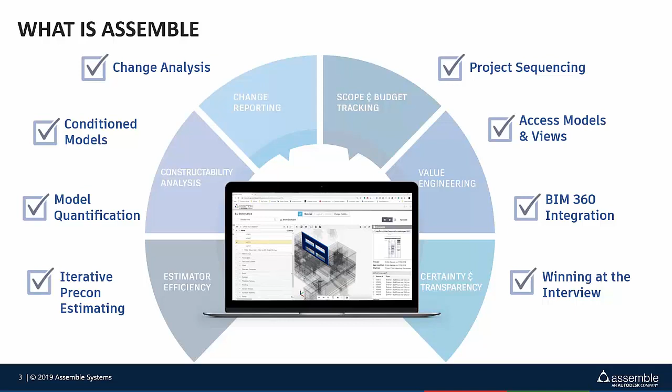Tomas, why don't you tell us a bit more about AIA? AIA is a construction company that has been in the market for 70 years. We have an average income of $100 million in construction. We are expecting to earn around $60 million this year. We have around 600 direct employees and above 2,000 indirect. We are delivering to our customers around 100,000 square meters every year, and we have delivered more than 700 projects in different market segments.

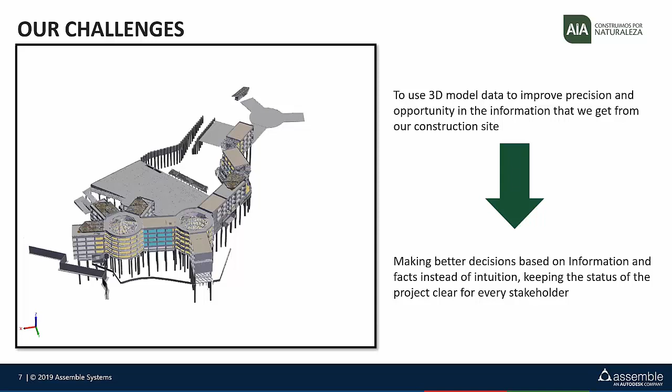So what is our challenge here? Our challenge is taking all the information that we put inside a 3D model and using it to leverage the way we make decisions. We are going to go through a process where we use the model to put critical information there so we can take it to our project team, our managers and senior managers, to make better decisions and make them on time, keeping the status of the project clear and letting every stakeholder know how the project is developing so far.

How Assemble is going to help us is by allowing us to use the model as a container for critical information like the budget and the schedule. Assemble lets non-Revit users manipulate and feed information into the model. This was one of the critical challenges: giving this information and letting everyone around the project interact with the model without the chance to damage the information or the model.

With the Excel add-in that you guys have developed, Assemble and Excel let us add some intelligence to the model and make decisions by itself, so we don't have to be very manual. We can add logic to these models and let the program do the hard work, giving us clear time and space to make decisions and look for critical problems.

Which are the key features that Assemble gives us? One main feature is we are web-based, or iPad with an application, so I don't have to have a very expensive, high-end machine to access models from any computer. I only need a good internet connection with good speed, and that's all I need as hardware. No software to manage, no trouble with licenses or installing anything on Windows or Mac OS. It's just a web page.

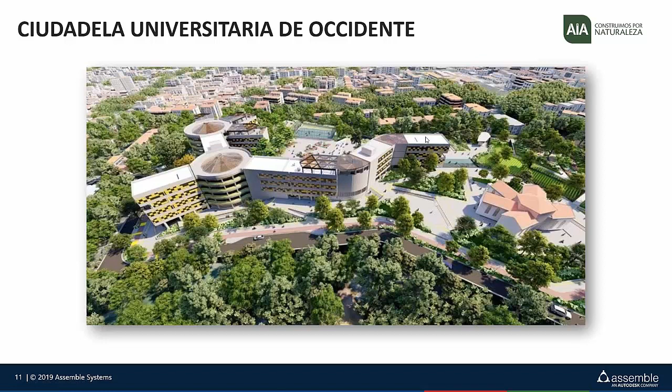So let's go through the case study. We'll use one project under development right now, which I hope will show you this process of controlling schedule and cost using this platform. Our case study is Ciudadela Universitaria de Occidente, a public university here in Medellin. It's about 13 different buildings, 5 stories high, with site development around 25,000 square meters of building construction, 30,000 square meters of landscaping, building new capacity for up to 8,000 new students in the city.

The special thing about this project is it's all about social transformation around a place that has been affected by violence here in the city. The site of the project used to be a jail for women, and it is a public project.

One of the main key features of this project is that it is the first public project here in Colombia that has some BIM requirements for the general contractor for the bidding process. That's actually one of the main reasons AIA won the bidding, because we had the BIM experience to make the project come true.

It's a project that is financed by the Empresa de Desarrollo Urbano, a public company here in Medellin that is in charge of the landscaping and urban development of the city.

So which were the project expectations? The project expectations were around being able to track the status of the construction process at any point in time.

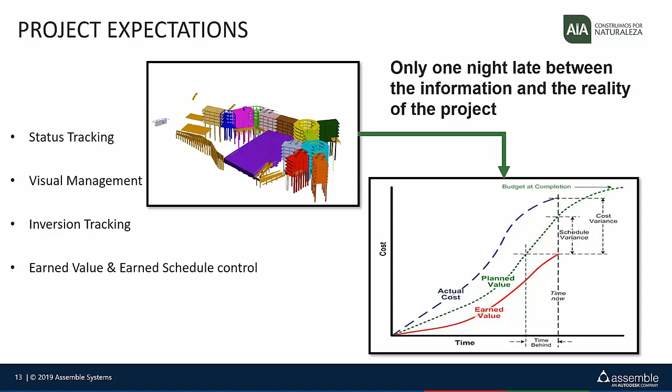So the magic about this is we never feed this information manually from the platform. We use the Excel add-in for it to get fed.

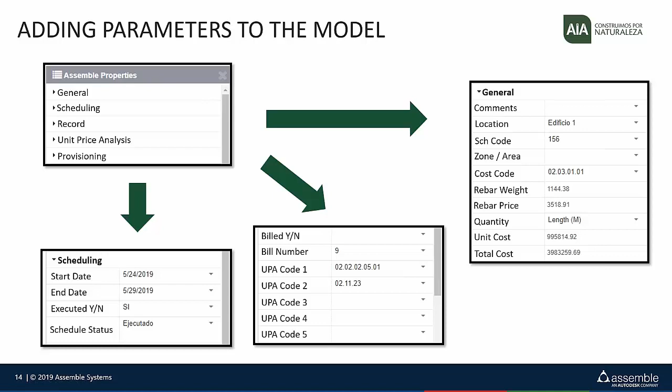So once we have these empty containers ready in the model, we have the heavy manual process here, which is checking every element in my model and matching this element with its own item in the schedule and with its own item in the budget. I have to take this information from my budget and this information from my schedule and feed it into the Assemble model. So this may be the hardest and longest process of all the workflow here.

One key thing to add in what you're talking about here is it's important to note that we're not working with a file, we're working with objects. That means you have the flexibility to have different budget information than schedule information, and that can be as granular as you need it to be.

In some cases you're selecting a big chunk of the building, a number of objects that have a particular location code or value or a schedule value, and that's different than the set of objects that might pertain to the specific budget information or cost information you're feeding in. I think it's a fantastic workflow in articulating or showing the setup you have here, and certainly interested to see how you're pre-populating or automatically populating some of this.

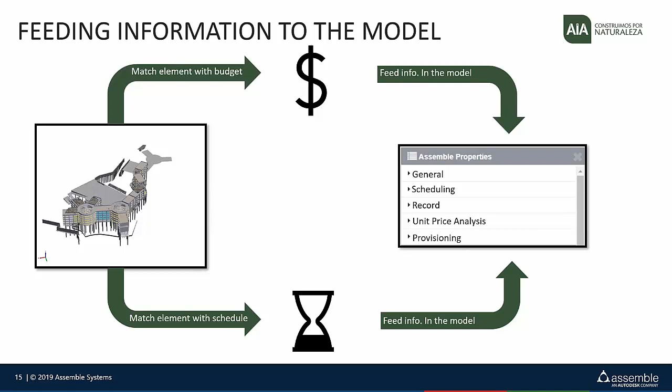So the magic about this is once you have all this information populated in the Assemble model, I can use the Excel add-in to download all this information to an Excel template, and here is where I add some intelligence to the model.

It's just about writing down some conditionals that look around this set of questions. Our Excel is going to ask if a task is done, yes or no, as I was showing around here. It will be a yes/no parameter, and then it will look for the current date you are running the analysis, and check the start and finishing dates for every element, and answer if the element should be done by that date or should not be done by that date.

So at any combination of these four paths, you will have a task that is on time, ahead of time, delayed, or pending.

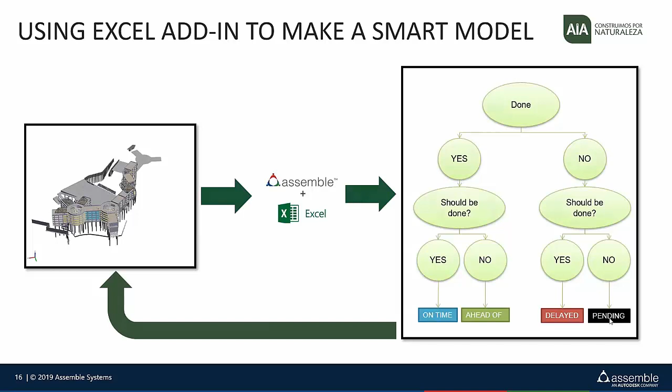And once we put this information from Excel back on Assemble, this is what it's going to look like. You'll have some activities on time, some activities ahead of time, some activities delayed, and we have some more color codings over here.

Maybe you can notice a little yellow here. This is because, going forward from these four possible states, we are filtering the look-ahead work for one week and for a couple of weeks ahead of the time we are running the analysis.

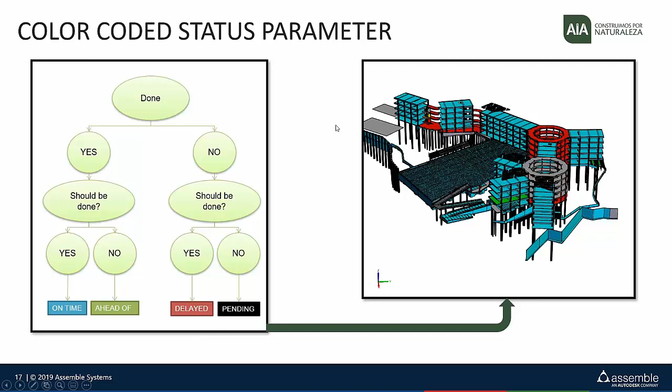So the model is helping us communicate to every stakeholder and team member what's the status of the project, but not only the status, also where they should focus for the coming weeks. So they should know to put resources here so they can finish these activities by the end of this week.

So how this works in the actual project: I have job site progress, and a site engineer who uses a tablet to feed the actual progress of the site into Assemble.

Assemble will do its magic, running in the cloud, and synchronize. Another person, not the site engineer, processes this information, sends it to Excel, updates the Assemble project, gets numbers for earned value control, and sends the tracking and reports to the management areas.

One key thing about this process is these two people don't have to be in touch—they don't even know each other. It's all about collaboration around this linear process.

Another key feature is we are doing this process on a daily basis, and it doesn't take more than an hour for one person and not more than five minutes for the other. So there's not a lot of effort around this process—it's almost automatic.

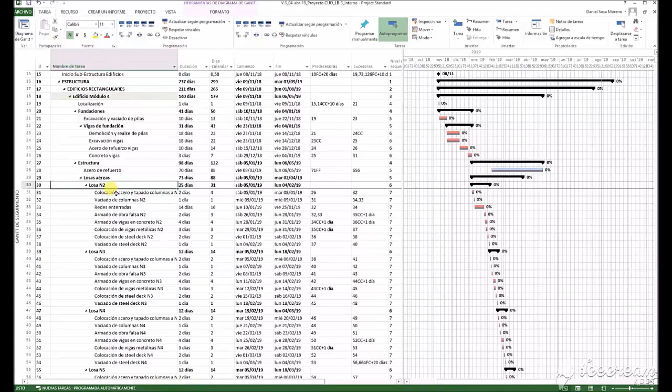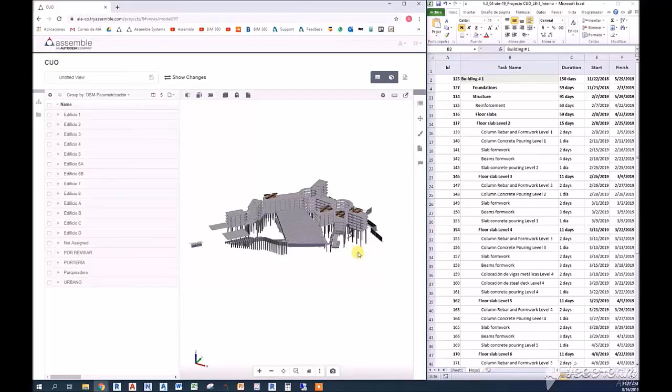And what we're going to do next is get into Assemble and do something Assemble recommends a lot: breaking down the whole model into little, more manageable packages. So here we take the structure, isolate only this little building, and create a work package for it.

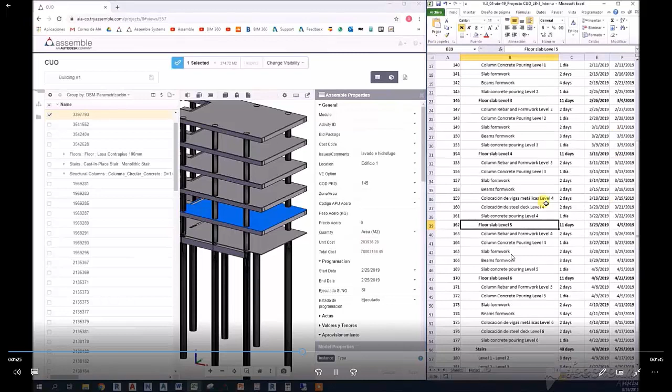Now I'm going to start feeding the dates from my schedule into every element in the model. Right now you're seeing me feed it element by element, but there are several ways to make this much faster—Assemble inventory helps a lot with filters so I can feed this information faster, and I can also use the Excel add-in to speed up the process.

And here we're doing a very similar process, but using our budget list. So you can see I have some coding on the left, a description, a unit of measurement, and a unit price.

So what I'm going to do is check which elements of the model match this description in the budget, and feed these elements with the item code and unit price, which you can see over the Assemble parameters—the columns match with the code column and the pricing column.

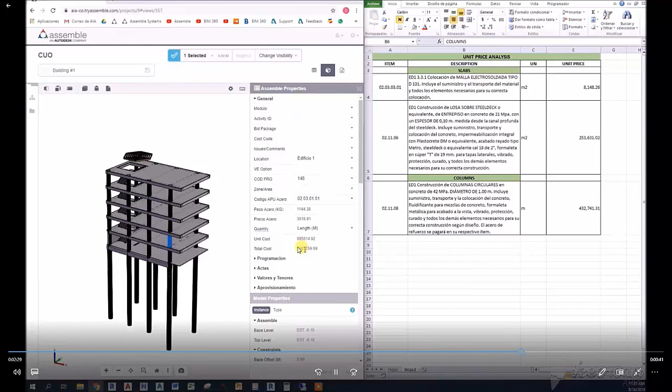So once we have this information, we're ready to make the model look like this. What we actually do is use the color-by-property tool in Assemble, giving matching colors for every possible status.

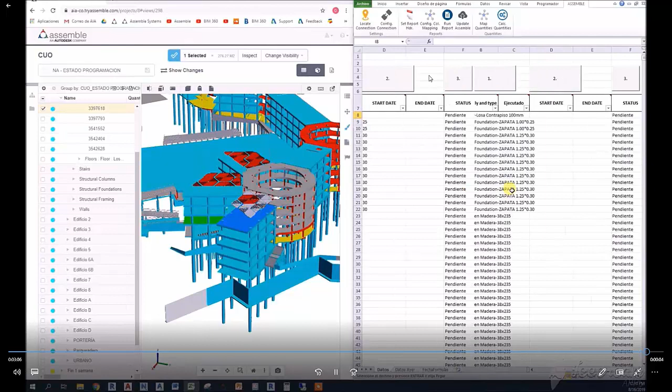So you are seeing that I am filtering based on the executed parameter here, but the way I'm going to feed this parameter is using Excel. So you can see here on the right side that I am downloading the information from Assemble to Excel. I am running my codes that are programmed under these buttons, and I will just feed the information back to Assemble, and it won't take more than the time it takes this video to play to make all this process.

Which are the results? So we have used this process and this method in 4 different projects so far. We have an office building, this university, a residential building, and a bridge. So yes, it works for infrastructure. It's even easier. The challenge around the infrastructure is getting the model done, but it's much easier to use Assemble in an infrastructure project.

One of the key things we achieved was reducing project reports from 1 month to 1 day. So we had these reports that kept coming on a monthly basis, and they were not very accurate around the real information of the project. So we felt we were not having enough information to make the right decisions. So we not only reduced this time from 1 month to 1 day, but we improved the report accuracy by at least 50%.

How did we find out about this 50%? Because for the first project we tried this, we ran a parallel version of the traditional way of tracking the status of the project, and we kept finding some big differences between both information, but the information that we processed in Assemble always had the right information. So we ended up trusting in Assemble and finding out that our last way of controlling was pretty inaccurate.